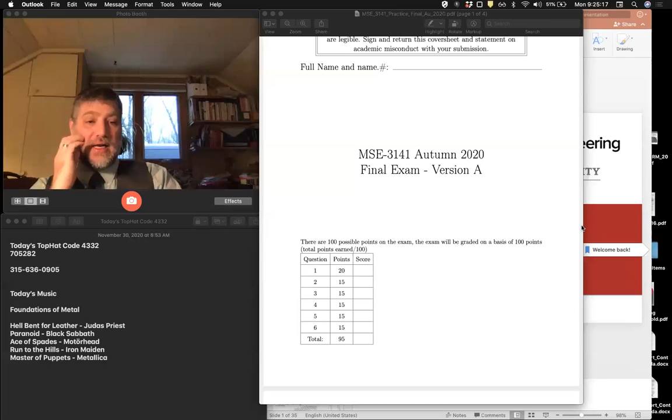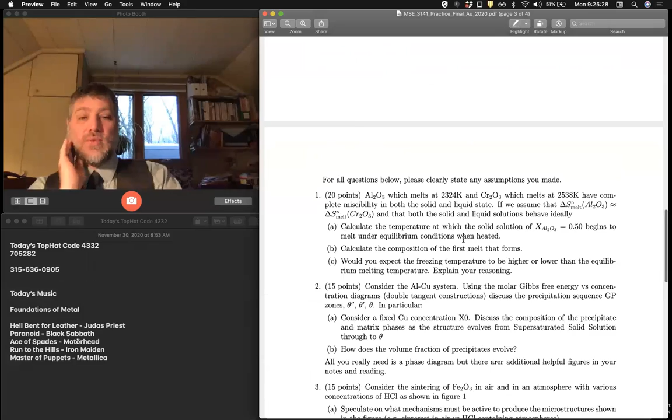Okay, so let's take a couple quick minutes and just take a look at this. I'll come back to question 1 at the end because that's the most difficult one here.

The exams, this practice exam and the real exam, were written at the same time. Like I said before, I came up with a list of all the questions. They were approximately randomly sorted, meaning they were placed into two piles randomly, but then I had to do a little bit of switching to get the difficulty between the exams about the same. Then one of them was chosen at random to be the practice, and one was chosen to be the final.

So what you see here is representative of what you'll see. Of course, you're not going to have these same questions, because I wrote up a bunch of questions all at the same time, but this should give you a clue to the topics. The final is cumulative, but it is more heavily weighted towards the stuff after the midterm.

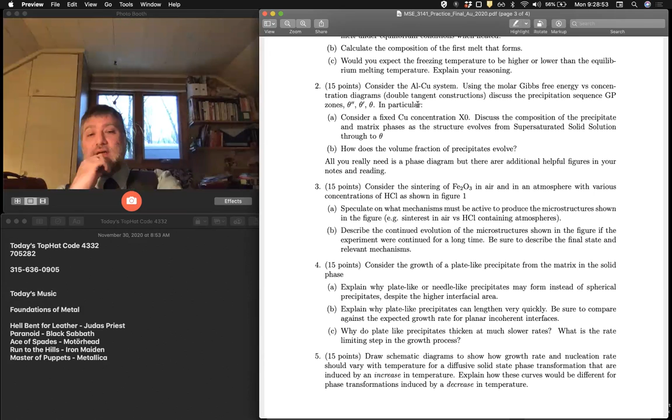Okay, so let's look at question 2. Consider aluminum copper—this was a system we talked about in a little bit of detail. Specifically, we talked about the precipitation sequence of GP zones, theta double prime, theta prime, and theta. And we remember from the phase diagram that theta is the thermodynamically stable phase.

GP zones and these other phases are the metastable phases. And I ask you to discuss this precipitation sequence, specifically using the molar Gibbs free energy versus concentration diagrams, or the double tangent constructions.

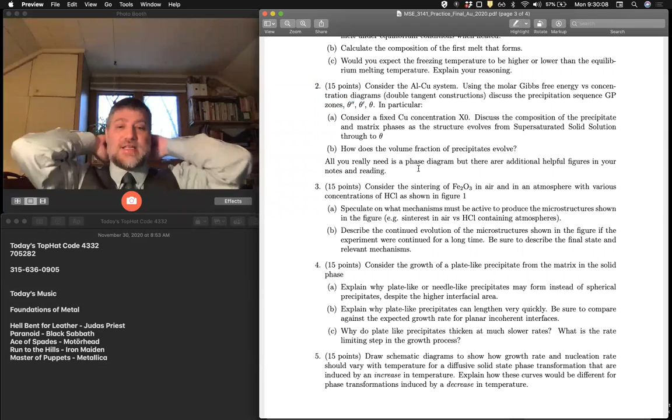So the first thing you're going to need is to check out the phase diagram. There are additional helpful figures in your notes and readings, but the phase diagram is the most important—that shows the solvus of all these different phases.

And then I say, just consider that you're at some fixed copper concentration and discuss the precipitation sequence. As you go through it, what are the compositions of the precipitate and matrix phases? Remember that the GP zones are essentially clusters of copper atoms, so the GP zones are much higher in copper than the other precipitates. Then theta double prime is a stoichiometric compound that's lower in copper than the GP zones.

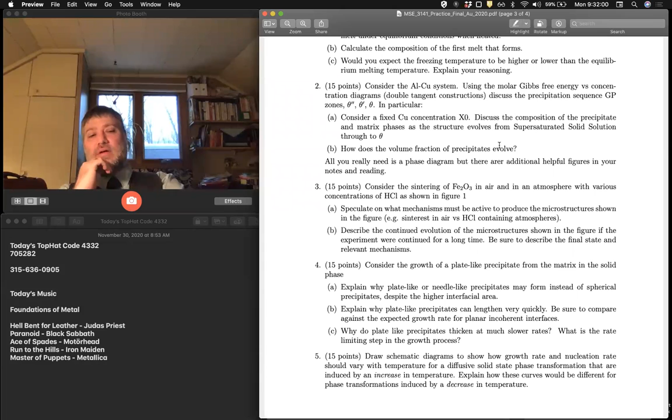So if I keep the same amount of copper in the precipitates, what has to happen to my volume fraction as I go up? The precipitates become leaner in copper, so there has to be more of them. And if we look at where the intersections in our common tangent are, it means that our matrix is also getting leaner in copper. So I'm expecting a couple paragraphs as you step through all of this, with a couple sketches of the Gibbs free energy curves.

With perhaps some things like the chemical potential, the common tangents in there, and some chemical potential information to talk about what's the driving force, where are things going to move, right?

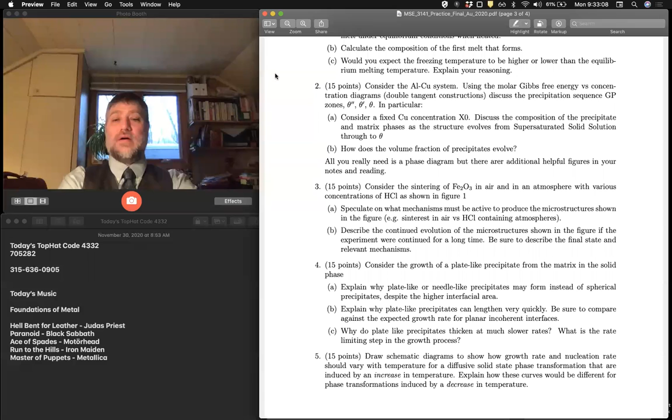Okay, so the next question, let's look at sintering of a ceramic. This is a figure that's right out of the reading. The question itself, though, is not.

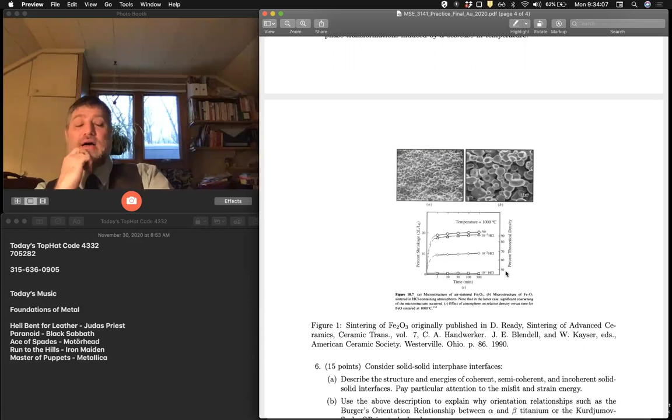So we talked about this example, how different conditions can lead to either coarsening or densification, right? And in this case, this is iron oxide sintered in air or hydrochloric acid environment. And clearly we get very different microstructures that have different amounts of different theoretical densities, or different fractions of the theoretical density achieved during the sintering process, right?

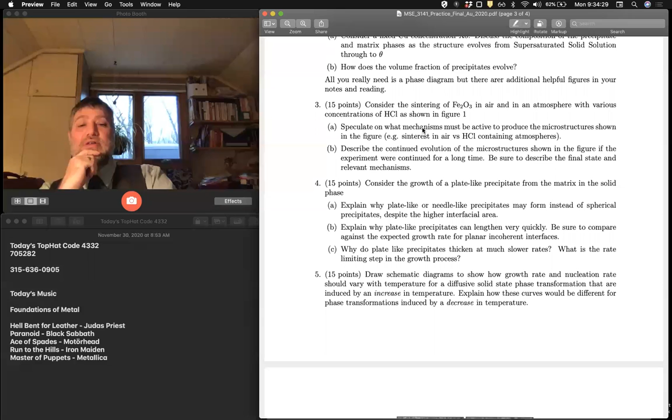So what I want you to do is discuss what mechanisms have to be active, right, to produce the microstructures shown in the figure, right? And that's probably a paragraph, a couple paragraphs, right? A paragraph for each mechanism, for each figure. Maybe a couple sentences on what mechanisms you need for densification, what you need for coarsening.

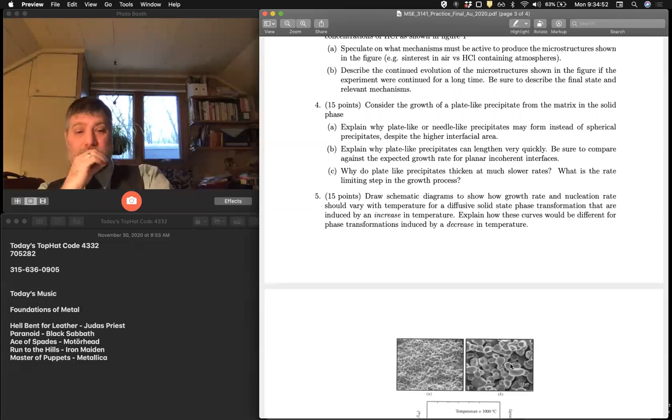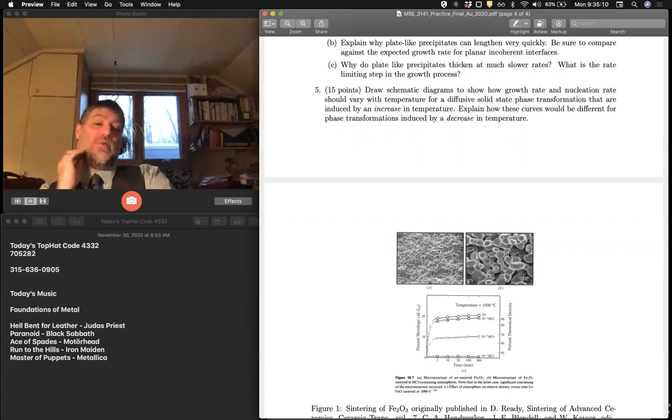And then I say, what happens if we continue to hold these for a long time, right? If I extended this out for several more hours, what would happen with both of these microstructures? Okay.

The next question, I say, consider the growth of a plate-like precipitate from the matrix in the solid phase, right? I ask you to explain why plate-like or needle-like precipitates will form instead, in some cases, instead of spherical precipitates, even though they have a higher interfacial area.

Okay, why do plate-like precipitates lengthen very quickly, right? Compare the expected growth rate against the expected growth rate for planar incoherent interfaces. So that's probably a clue here that I mentioned incoherent interfaces and a comparison.

And then why do these plates thicken at a much slower rate? What is the rate limiting step of the growth process? So again, probably a paragraph for each of these prompts, with a couple sentences. Okay.

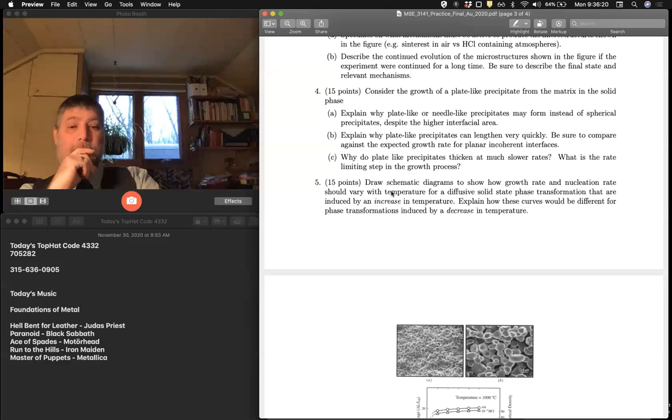Schematic diagrams to show how growth rate and nucleation rate vary with temperature for a diffusive solid state phase transformation that is induced by an increase in temperature, right? And how is this curve going to be different from phase transformations induced by a decrease in temperature? So you got to think about what's the driving force for each.

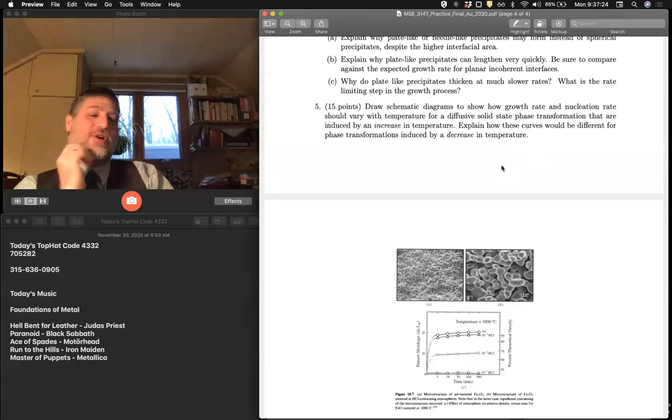And the fact that I say explain how these curves would be different should tell you something, right? If I'm asking you to write things out in a paragraph form, that they should be the same is probably not what I'm looking for. Okay.

And then the last question is about interfaces. So describe the structure and energies of coherent, semi-coherent, and incoherent solid interfaces, right? Pay particular attention to the misfit and strain energy, and use the above description to explain why orientation relationships, such as the Burger's orientation relationship between alpha beta titanium or the Kurdjumov-Sachs orientation relationship in steels develop, right?

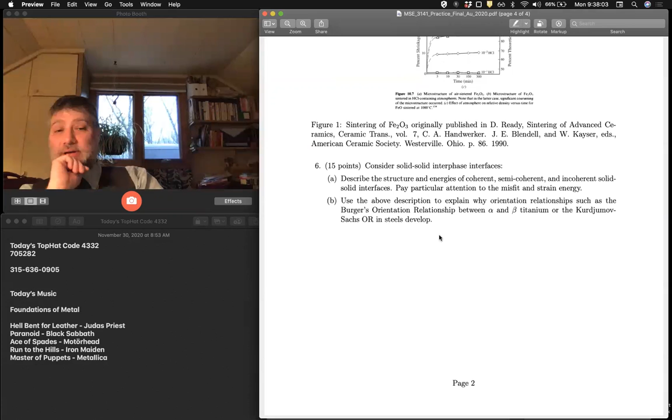Right, so 5 of the 6 are very conceptual questions that I'm expecting a well thought out, well formulated essay type response. Meaning logical sequence, right? Think back to your high school days with 5-paragraph essays.

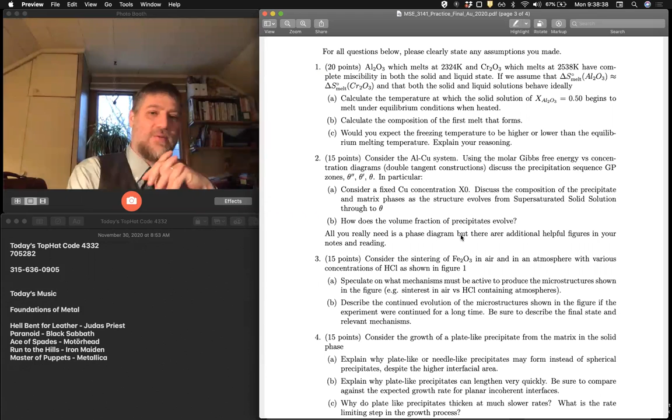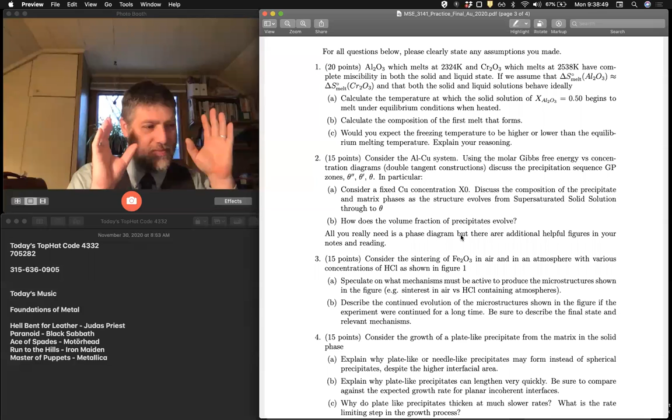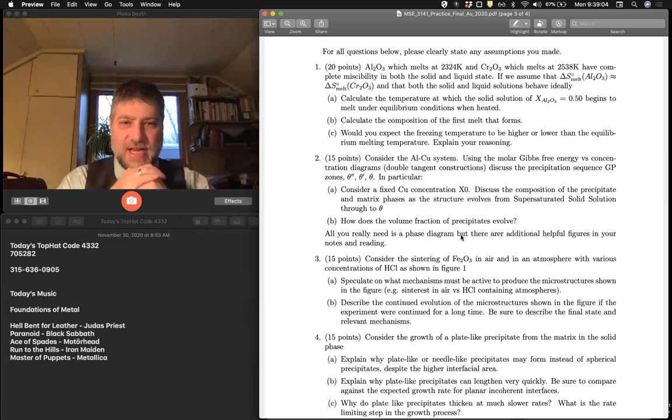I don't want a 5-paragraph essay for each one of these prompts, but I do want an answer, a clearly stated opening sentence with logical sequence of evidential points that support your statement. Okay. Question 1, there is one calculation here, right?

Which should be easier than the calculations on the first exam, but are a lot in this case, it's very much in the same vein. I say we have alumina and chromia, and you have the melting points for each. I also say they have complete miscibility in both the solid and liquid state. And I further say, consider that the entropy of melting is the same for both, right?

So what that means is that alumina and chromia have the same crystal structure and equal sizes and all that good stuff, so that the entropy change on melting is very similar.

We're also going to assume that both the liquid and solid solutions are ideal. So if I have a mixture that's exactly 50-50, calculate the temperature at which the solid solution begins to melt, and then calculate the composition of the first melt that forms.

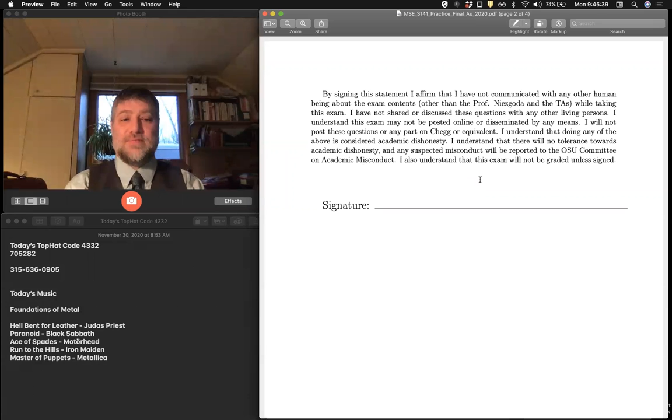So let's talk Martensite. Okay, so first off, I have a general question. Yeah, sure, go ahead.

Has Wednesday's lecture been posted? Wednesday's lecture didn't make it up? I looked this morning, I couldn't find it, but it might be there. Let me sort of, it's supposed to be scheduled. I have a YouTube scheduling thing that's supposed to put them up automatically, and I guess that is somehow broken. It's supposed to, because I store this, it gets uploaded to a Dropbox, and then YouTube's supposed to automatically post things from that Dropbox. So immediately after class, I will post Wednesday's lecture and today's. I'll do it manually instead of relying on the bot. I wonder why it's not working. Thanks for pointing that out.

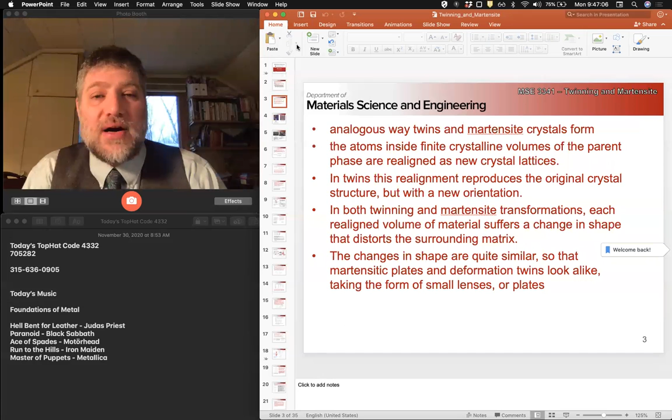So on Friday, we talked about twinning. Well, first off, we talked about civilian versus military, or diffusionless, versus civilian or diffusional transformations. And we said that the military transformation involved the cooperative or homogeneous movement of many atoms, whereas the diffusional transformation is the uncoordinated movement of atoms by random walk diffusion.

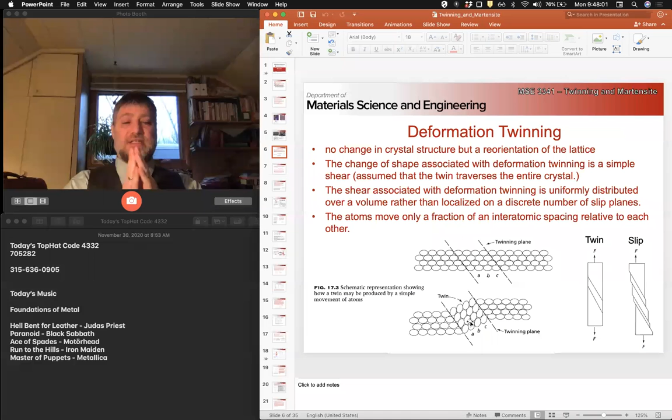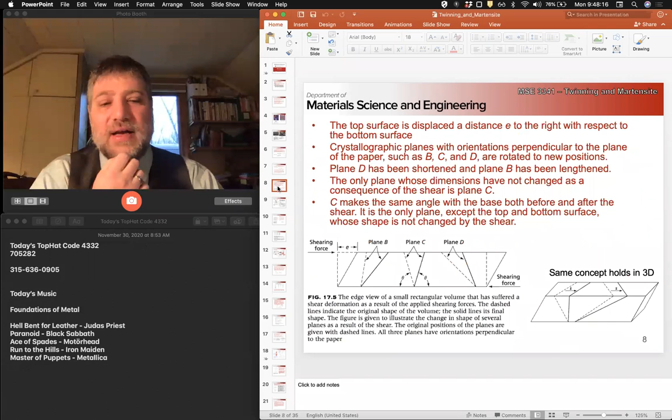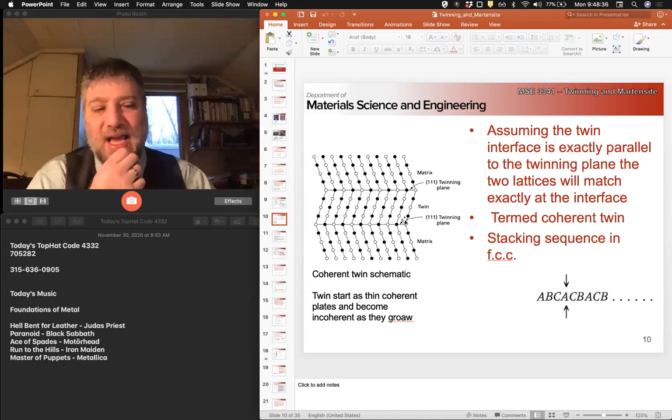I talked a little bit about deformation twinning to basically set up how you can have a lattice transformation, or a transformation that involves a large rotation of the lattice, and that generally there's shear involved. Twinning goes from the same crystal structure to the same crystal structure. So in case of FCC, it goes from FCC to FCC, and we have a 60-degree rotation about 111, which gives us essentially an error in our stacking sequence. Instead of ABC, ABC, we now go ABC, ACB, ACB in the twinned region.

And then that brought us to Martensite. So Martensite is exceptionally important in steels, but it's also very important in many ceramic materials. I'm not aware of any polymer Martensites, although there might be, I just don't know them off the top of my head.

Martensite is very similar to twinning in the sense that it's a shear transformation. But in this case, we're going from one crystal structure to another. For steel, we're going from austenite, which is FCC, to body-centered tetragonal martensite, which has a higher carbon content than BCC ferrite.

Martensite is athermal, meaning it's not thermally activated. We don't have to overcome an activation barrier for it to occur. Once the Gibbs free energy is there, it transforms. So we have a well-defined martensite start temperature, and as we keep lowering the temperature, we will create more and more martensite until we get to martensite finish.

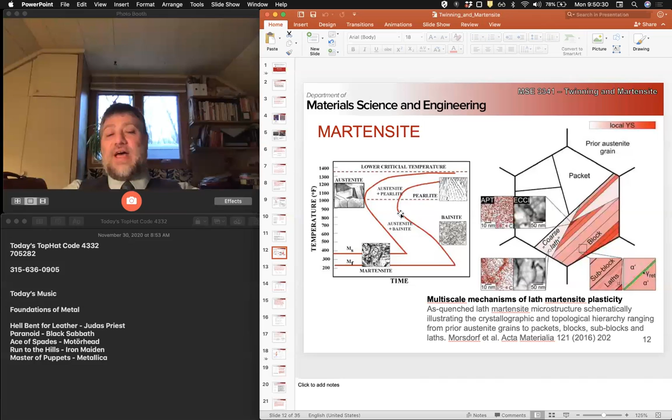The TTT curve also shows us that we have to quench fairly quickly, because if we cool slowly, we're going to nucleate pearlite. Or if we go a little faster, we're going to enter into the bainitic region.

But that involves nucleation, growth, and diffusion. We cannot transform directly from gamma to alpha at this composition by a martensitic reaction because the free energy of alpha is higher. So without long-range diffusion, we can't lower our free energy. The transformation will only raise it.

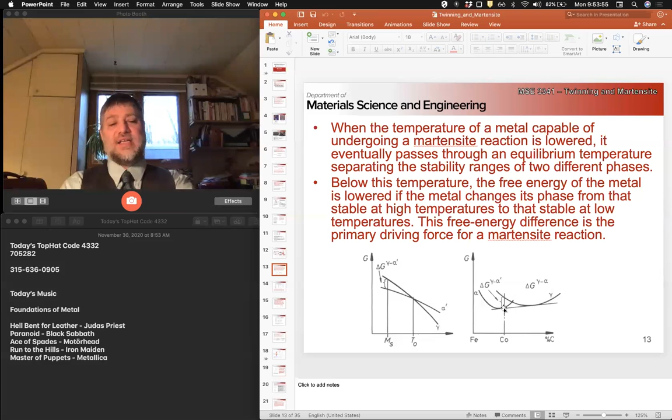And if we locally reduce everywhere, we also can globally reduce, but we have to be at a much lower temperature in order for, at our composition, this austenite free energy curve to be high enough and our ferrite free energy curve to get low enough, so that we have a sizable delta G for the transformation to occur.

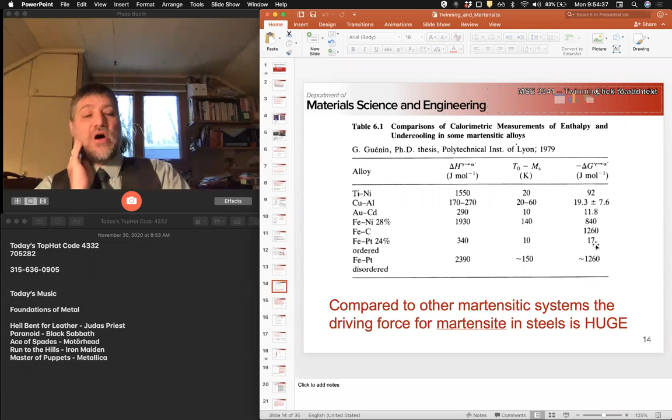So if we look at what are the enthalpy change and our Gibbs free energy change on formation of martensite, we can see lots of these are metallic systems that undergo martensitic changes. Take a look at the Gibbs free energy change for iron carbon relative to everything else. Compared to other systems, the driving force for martensite in steels is huge.

It's astronomical, in some cases two orders of magnitude higher than other systems. This is why in carbon steels, if you quench, and even in some systems if you air cool, you're going to get martensite, just because this driving force is huge.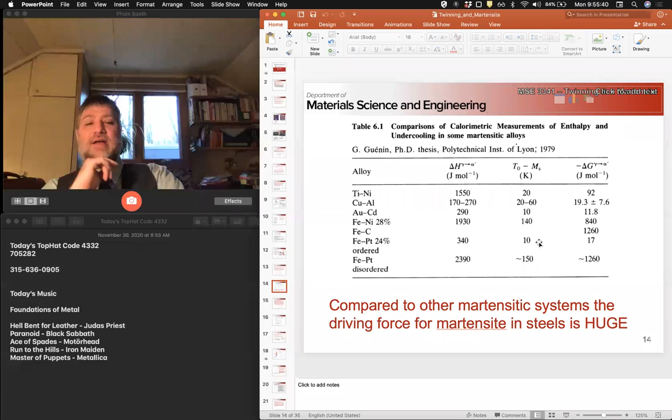Notice it doesn't list an undercooling, because in a lot of systems the driving force is so high that there is no concept of an undercooling for martensite. It's just so astronomically small we can't measure it.

So for twinning, we said that we had two undistorted planes: the first was the invariant plane or the twinning plane, and then we had the plane of shear. In martensite, we have something very similar. We have the habit plane, which is also an undistorted plane.

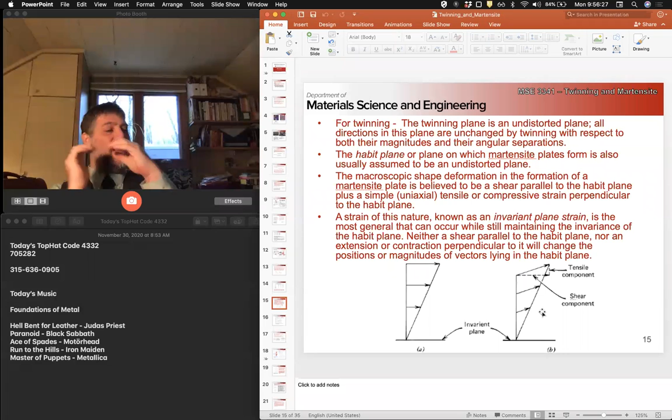But because we have a phase transformation, we actually have to have other strains besides the shear. In martensite, we have a volume change as well, because we're going from one crystal structure to the other, so there's a volumetric change and component to the change, instead of just the shear component. But for this all to work out crystallographically, we still need our invariant planes.

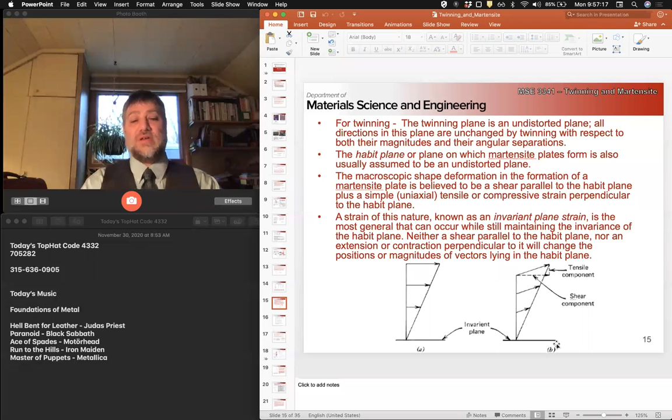That makes the crystallography of martensite more complex than the crystallography of twinning. So if we look at different systems, we can see that the shear component of the transformation is quite large. If we look at iron carbon steel, remember FCC to BCT, this is the habit plane and the shear direction, but take a look at the amount of shear strain associated with martensite formation.

20% strain, 20% shear strain. That's huge. What is the elastic limit? How much shear strain do we accommodate elastically? What's your offset that you use when doing a stress strain analysis?

0.2%, right? Two orders of magnitude higher. So this should tell you something about this transformation. This Martensitic transformation is exceptionally violent.

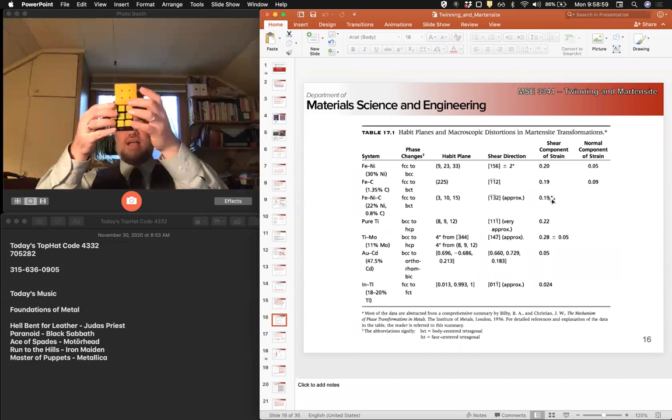What happens if I'm here and I have a 20% shear? What happens in these neighboring grains? How does this get accommodated in a polycrystal? What has to happen?

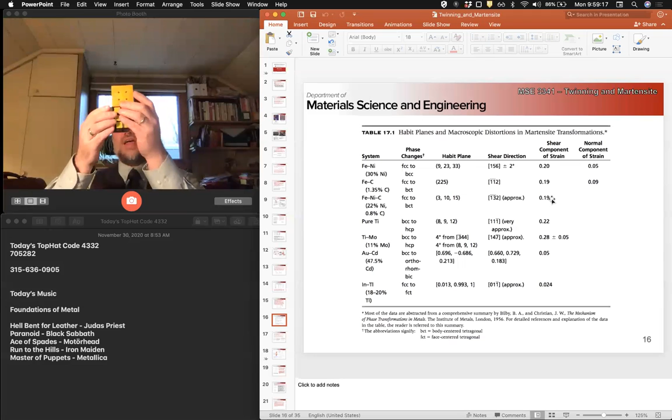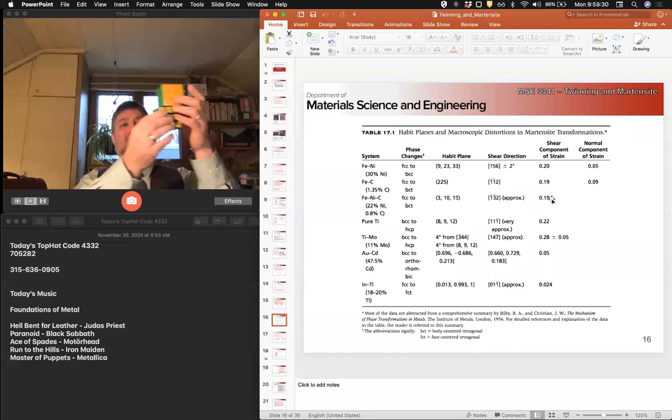I need plastic deformation out here to occur. I somehow need to maintain the continuity of my polycrystal without breaking. Some of that can be done if I have things out here that have the opposite shear, so I can do some accommodation that way, but generally there also has to be plastic deformation that occurs.

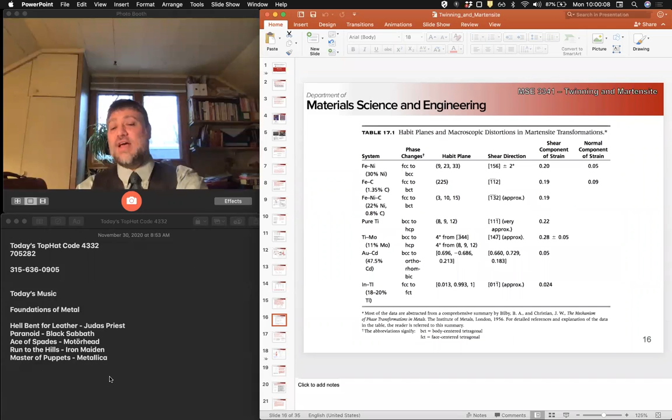And what's the volumetric component? In this case, the change in our lattice parameters when I go from FCC to BCT is close to 10%, so my overall strain in my system from Martensite becomes very large. And yes, it does actually form a chain reaction—I'll talk about that in just a bit.

We have this shape deformation in Martensite, this large shear, so we end up with shapes that look a lot like deformation twins. These lenticular shapes come about because this is what minimizes the elastic strain energy. In a graduate class or mechanical behavior class we talk a lot about that strain energy minimization, but it's not super important for the purposes of this class.

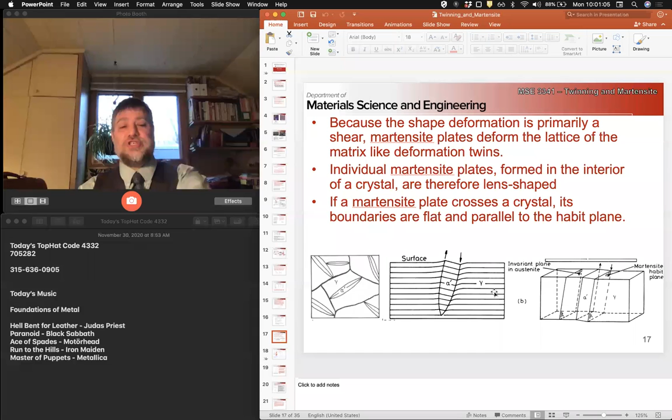But Martensite near the surface actually causes surface relief due to this shear. So if we have an unconstrained transformation, we get a big kink. If in a polycrystal where we have constraints, we get these lenticular shapes instead of big plates or slabs, because this is going to help maintain the shape and minimize the elastic distortion and the amount of plastic strain that has to be accommodated by the neighbors.

Okay, so Martensite in all systems generally will form orientation relationships. The orientation relationship in carbon steel is generally quoted as the Kurdjumov-Sachs, which has the close-packed directions parallel with each other. In iron-nickel we see a relationship that's called the Nishiyama-Wasserman, and then we have a whole family of orientation relationships called Greninger-Troiano, which are intermediate to Kurdjumov-Sachs.

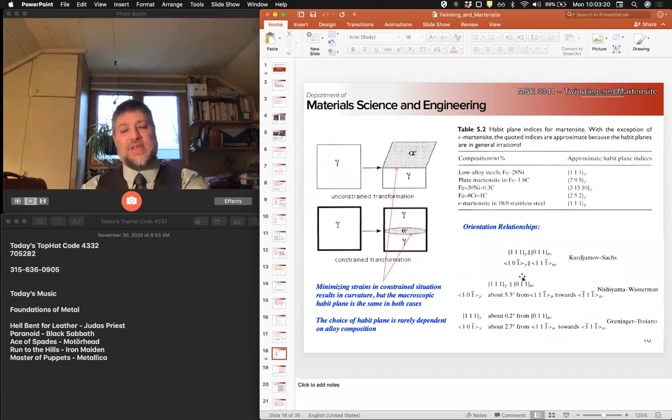Now, the thing about Martensite is in steels, the transformation pathway is dependent on the amount of carbon that you have, and the volumetric strain that you have is dependent on your carbon concentration. So we never actually observe any of these ideal orientation relationships—it's always somewhere in between because the carbon content is not always spot on for these to occur. We'll talk about that on Wednesday.

To wrap this up today, I want to talk about how we actually go from one lattice to another. So if we start with FCC, how do we end up as body-centered tetragonal? Well, Bain back in 1924 said if I stick two FCC unit cells together, I have this triangular bit here that's BCT.

I have another way of describing the FCC unit cell: I can create an equivalent lattice of body-centered tetragonal elements that's completely equivalent with respect to the lattice positions. And so Bain said, well, this is obviously way too distorted, this is much too tetragonal. But what I could do is squish it down a little bit and make it more square, right? This is what he called the Bain strain—now known as the Bain strain—so by expanding or contracting these crystallographic axes we get what is known as the Bain distortions.

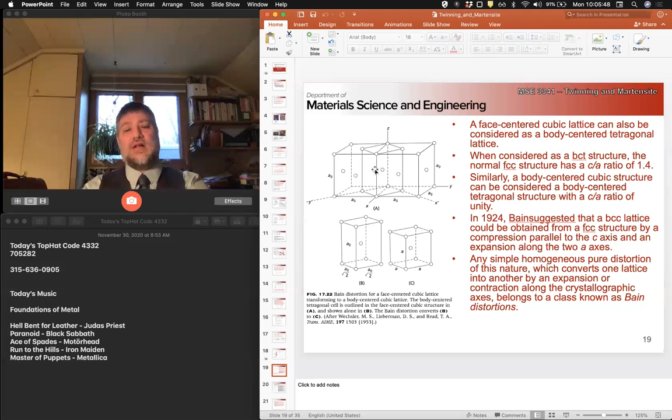However, this theory, as we went on, we realized is not true, because there is no invariant plane. So in order to get an invariant plane, we need something beyond this Bain distortion—we don't have the two shear planes where we have perfect atomic congruence between the FCC and the BCT. So in order to get that relationship, we need something more, and that's a series of steps called the phenomenological theory of Martensite.

And we'll talk about those on Wednesday. So Wednesday we'll talk more about Martensite.